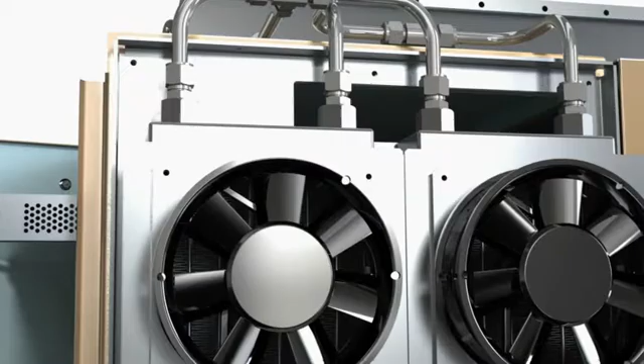You've probably experienced one of these situations before. You've invested countless hours creating and detailing a design. You then send it off to the production team only to have it sent back because they don't have the material in stock, suitable equipment, or they can't get the parts to fit properly. Now there is the added redesign cost along with delays associated with that.

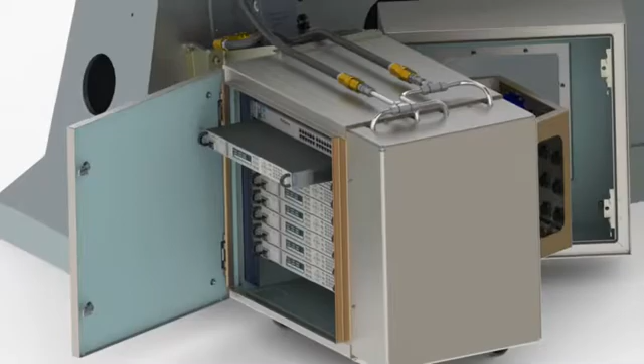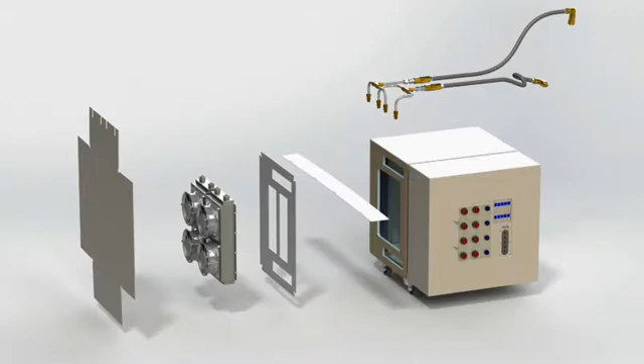Or how about when you're in a design review meeting early on in the project and they're asking about the cost to manufacture your design? You're still waiting on quotes from vendors, so you're unable to give them an acceptable answer. Wouldn't it be great if there was a way to check your design before you send it off or have an idea of what it will cost to avoid these types of situations?

SOLIDWORKS provides many tools to aid in tackling these challenges early in the design stage. Let's take a look at some of the ways you can keep a handle on manufacturing cost and ensure that parts will go together and perform the way you require.

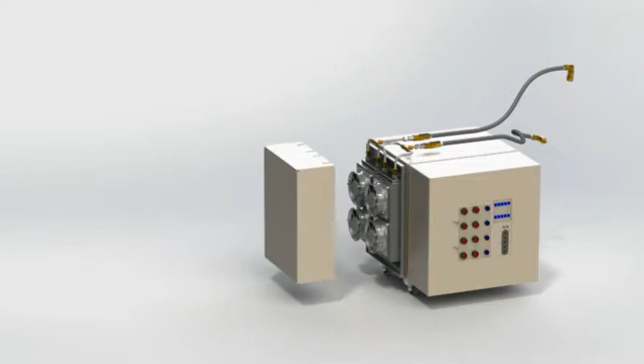It's important to ensure that parts will fit together when being assembled on the factory floor or by the consumer. SOLIDWORKS provides comprehensive tools for not only seeing if parts interfere, but also if holes align. You can check hole alignment for the entire assembly or just a subset.

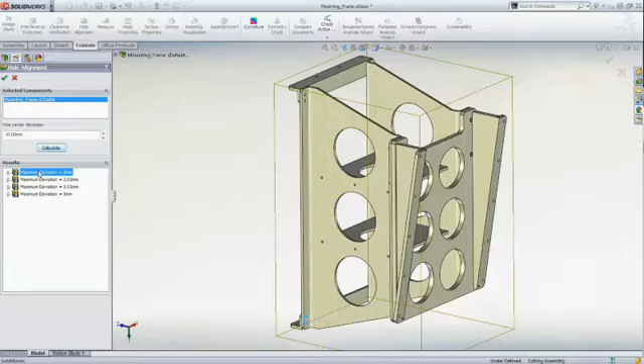In this support frame, we can see that the mounting holes do not line up with the side brackets. A quick change to shift them lines up the holes and corrects the problem. So now we can mount the unit to the base station and avoid the cost of having it found on the assembly line.

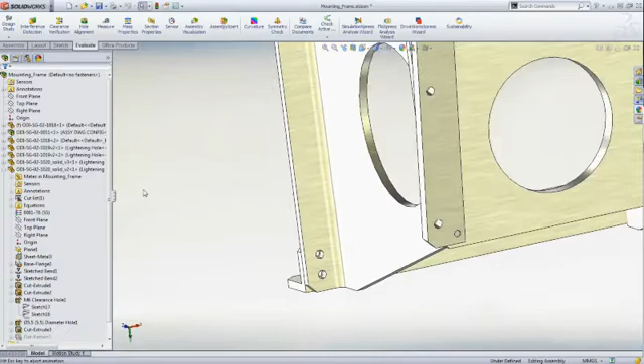Function and performance are important aspects of manufacturability. Ensuring that there is adequate clearance for the liquid cooling system is critical to provide sufficient airflow to dissipate heat from the power racks in this enclosure. Using the SOLIDWORKS clearance tool, we can check the entire assembly or just the parts of interest, such as the fan clearance to the interior wall insulation.

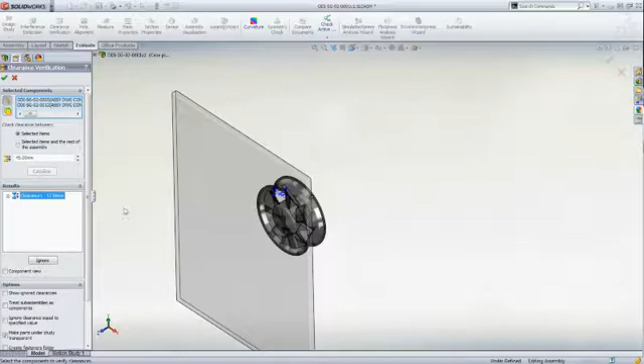Any clearances that are not met are shown, and the conflicting parts are isolated, making it easy to identify the problem area. A quick adjustment to the depth of the cover corrects the clearance and avoids potential issues of overheating and the cost of warranty repairs on the final product. SOLIDWORKS Flow Simulation can also be used to accurately analyze the cooling performance for the unit.

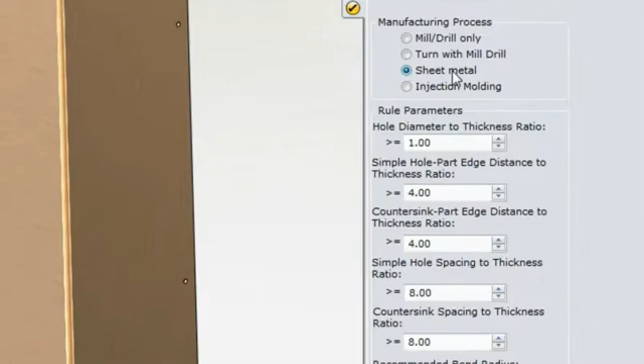SOLIDWORKS provides other tools to check out the suitability of a design for manufacture, such as DFM Express. You can adjust default check settings for a variety of manufacturing methods. For sheet metal, there are options such as allowable hole edge offsets, hole material thickness ratio, and approved hole sizes.

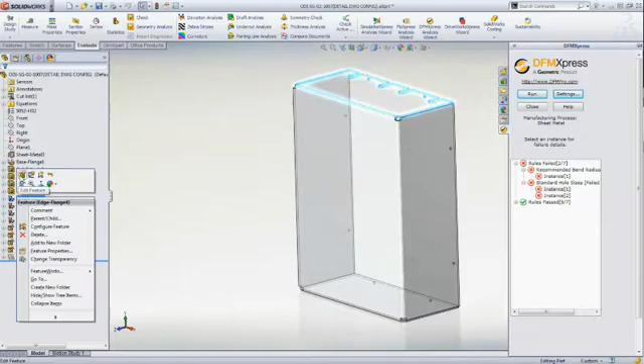When you run the check, any feature that does not pass the settings is clearly highlighted with detailed tooltips explaining why the feature didn't pass, making it easy to identify and correct problem areas immediately. After addressing the issues, we can run DFM Express again to verify that we have corrected all the problems, again avoiding the time and cost of design rework after production start.

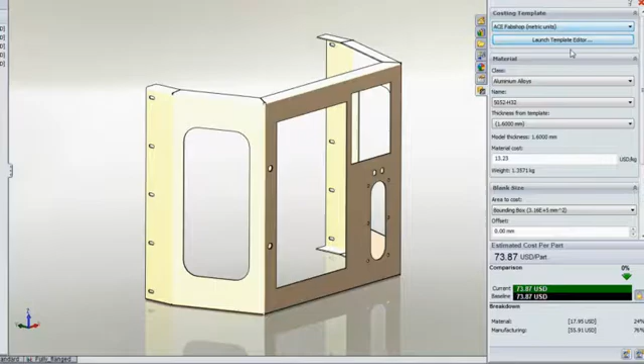When developing a design, you are often trying to weigh the cost of adding features with the benefit they provide to reach the right balance that not only fits into your budget but is also what you can manufacture. SOLIDWORKS Costing is more than just a cost estimation tool. It can provide feedback on available stock materials, as well as tooling and equipment for manufacturing sheet metal and machined components.

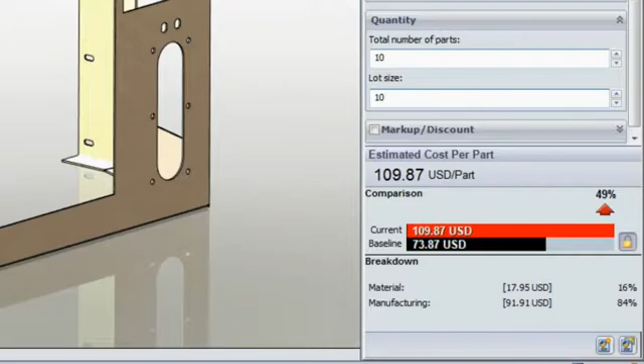Using detailed built-in templates that are easy to customize, SOLIDWORKS Costing helps you quickly calculate the manufacturing cost for parts made internally or using regular vendors. Since the tool is completely automated, you can evaluate different vendors, materials, or thicknesses and see the price update immediately. Setup costs are broken down over lot size, so you can easily see the cost difference of running smaller or larger lots.

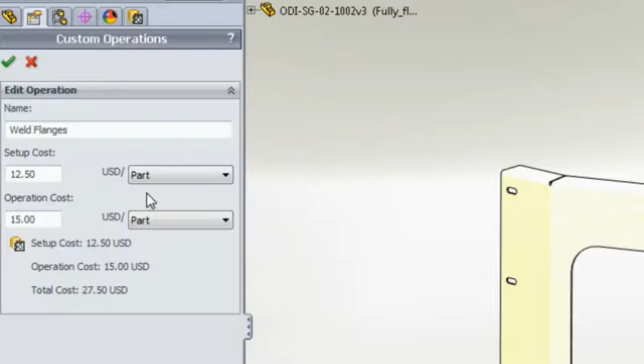The costing tool works by looking at the various part features and assigning these to specific manufacturing operations. Custom operations can be automatically accounted for based on the template or manually applied as needed. For this mounting panel, there are custom operations for countersunk holes and for welding the edge flanges.

A key benefit of SOLIDWORKS Costing is being able to set a baseline to do fast what-if scenarios. By performing a simulation using the worst loading condition, we were able to verify that without the flanges, the panel deflections and stress are still well within acceptable limits. We can see that without the edge weld operation and a reduced number of bends, the cost has dropped significantly.

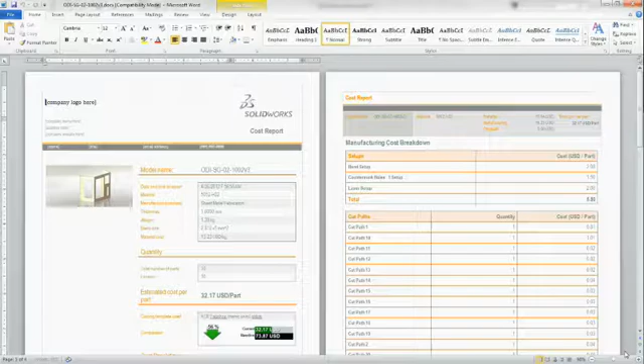Everything is automatically captured in a highly detailed report comparing your current concept to the baseline. So when you have to present costing in a design review, it's ready to go. It contains a high-level summary along with detailed cost breakdowns of the initial and final design variations.

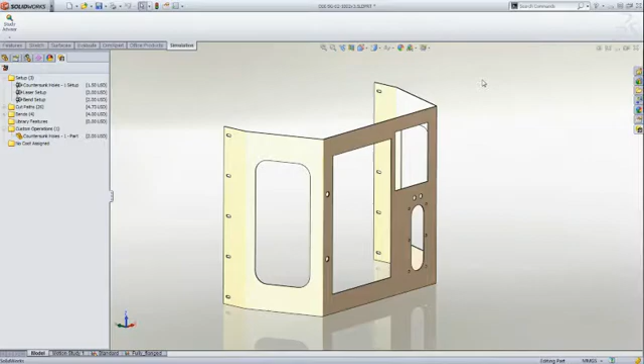The built-in template editor makes it incredibly easy to set up operation pricing. Simply define the available stock materials, thickness, as well as the cutting and forming tools, and anyone in the company can use it to estimate costs. This really ensures high consistency and repeatability across the entire organization.

In an assembly, the costs are rolled up, which makes it easy to evaluate manufactured items relative to purchased items, or simply identify which components contribute the most to the cost of the project so that you can consider alternative options.

We've seen how SOLIDWORKS has many features to help you check fit, function, and manufacturing cost all in your design environment and before having to produce anything. These powerful tools will help you keep designs within budget, on time, and with fewer design corrections during production.